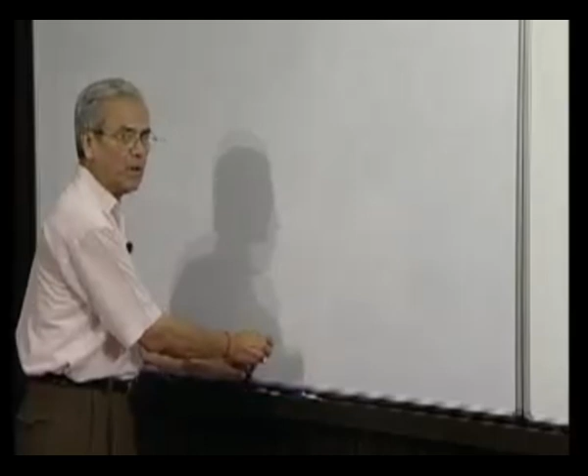What we will do now is analyze or investigate the oscillation of systems, assuming a certain amount of damping to be present. Before we make a mathematical model which we will ultimately solve and investigate, we have to first see the various ways energy is dissipated from a system during its oscillation. The various mechanisms which are common are as follows.

One is viscous drag, which results from the friction of a solid object when it moves in a fluid, and when it can be treated as laminar motion, meaning the Reynolds number is low, or the system behaves in a linear fashion. We will see that very soon. This kind of damping is called viscous damping.

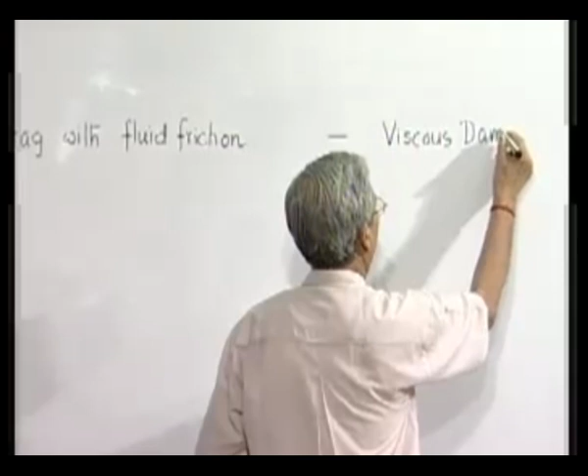The next mechanism is energy loss due to solid friction between rubbing solid surfaces. This type of damping is called Coulomb damping.

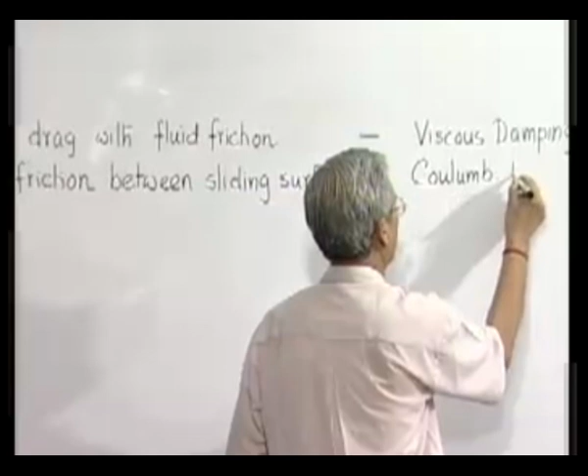For example, if a pendulum oscillates here, the whole body, the rod, etc., have relative motion with the surrounding air or whatever fluid it is immersed in. That gives rise to dissipation of energy, causing viscous damping. Sometimes the pin of the pendulum in its hinge, if not properly lubricated, may give rise to solid friction between the housing or journal of the bearing and the bearing itself or the pin. Similarly, there can be other situations where a vibrating system involves two solid objects rubbing against each other, giving rise to Coulomb damping.

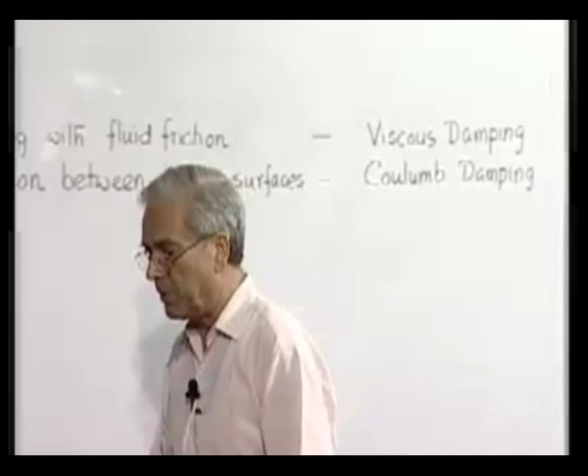Now, for example, if we take a simple cantilever beam, or a simple beam rather, go to space and hit it so it starts vibrating, and leave it there—there is no fluid surrounding it for viscous damping, nor contact with any other solid object for Coulomb damping. But will the vibration remain constant, or will the energy remain constant, meaning there is no dissipation? No, there will still be dissipation, because during any deformation of a solid object, there is internal friction.

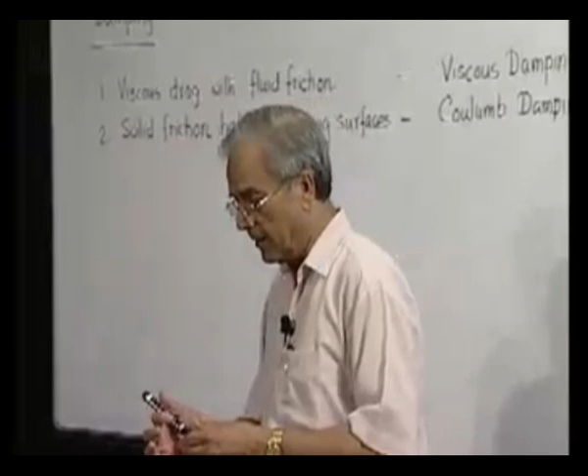That is a very complex mechanism which we will not go into—how the layers of molecules rub against each other, and the grain boundaries may have relative movement against each other. All these things give rise to a certain amount of conversion of mechanical energy into lower forms of energy like heat, and such energy dissipation is called internal friction.

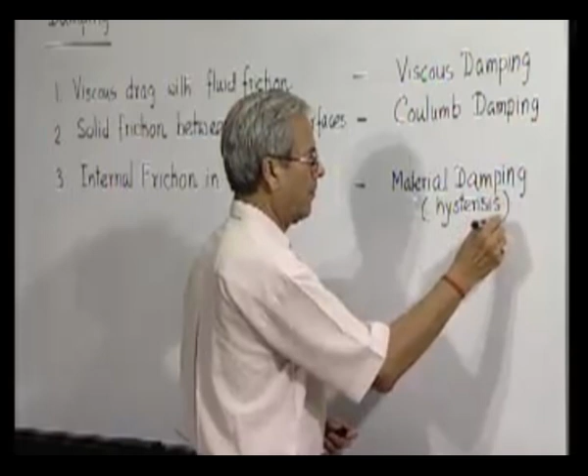This is called hysteretic damping or material damping. Another possibility of dissipating energy is in the form of radiation, which can also give rise to energy dissipation.

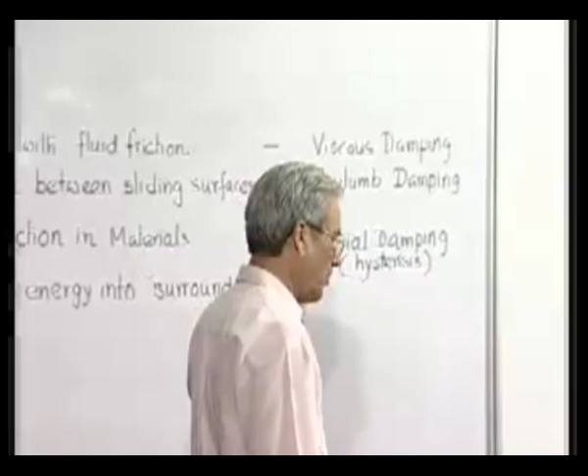However, we should keep in mind that the first three are of much bigger importance so far as engineering systems are involved. The most commonly involved problems we will consider involve viscous damping, the reason for which I will discuss. Then we will also discuss Coulomb damping, the dissipation due to solid friction, and quickly cover internal friction or hysteretic damping in materials. First, let us take viscous damping.

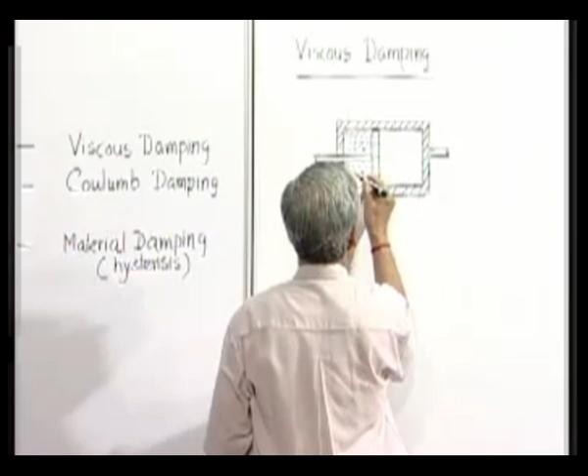Let us consider this sectional view of a cylinder with a piston inside. The piston is connected to one rod, and the cylinder is connected to another. The inside is filled up with some kind of viscous fluid, some oil or something like that. Now the cross sectional area is, say, A.

A1 is the cross sectional area. This piston has fine holes drilled into it, through holes, and the total cross sectional area of all these holes which have been drilled is say A1.

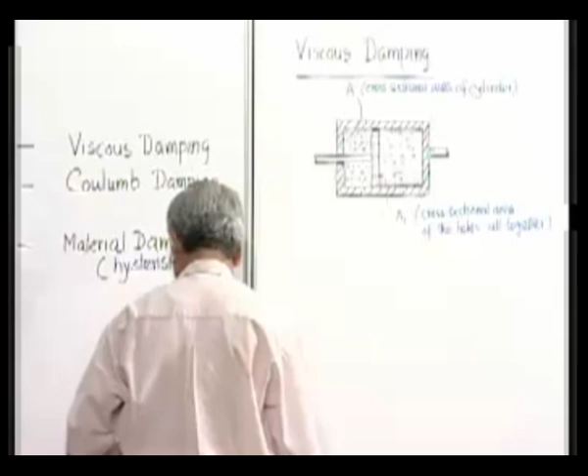Now, if I keep this end fixed and try to pull this end with a speed x dot, that end is fixed. To draw it in this direction with a speed x dot, we have to apply a force Fd. Now how Fd depends on x dot, that is our problem.

So what happens when we pull this piston in this direction, fluid on this side goes through these holes to the other side, because fluid is incompressible. When we try to reduce this volume, obviously the fluid has to go to the other side where a similar amount of volume is created.

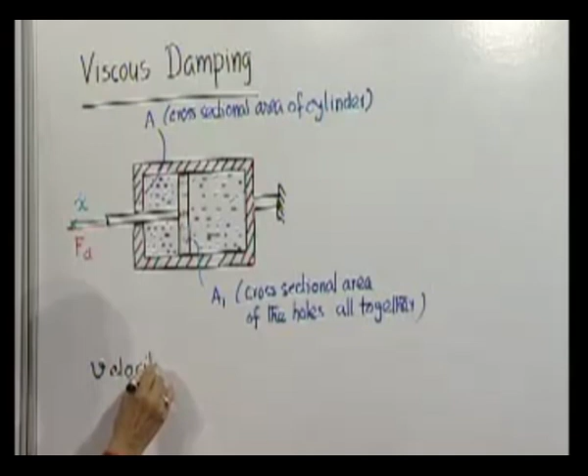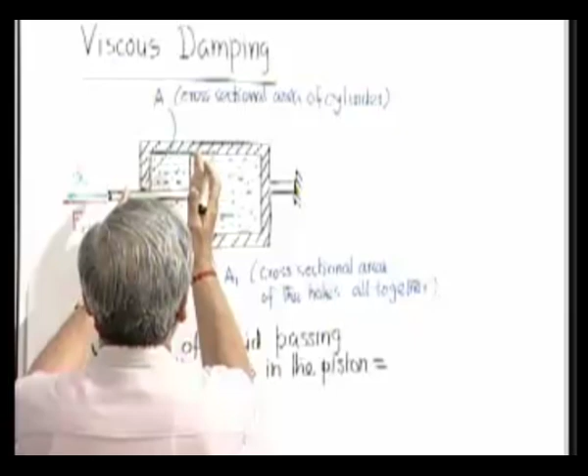So the velocity of the fluid passing through the holes drilled in this piston will be how much? We know the amount of fluid which has to go per unit time will be the speed with which it is coming to this side into cross sectional area. We ignore the cross sectional area of this rod, which we can ignore. So the rate at which total volume of fluid must flow to this side is cross sectional area A times the rate at which this volume is reducing, that is x dot into A. And the cross sectional area through which it flows is A1, total amount. So the velocity through this hole must be this.

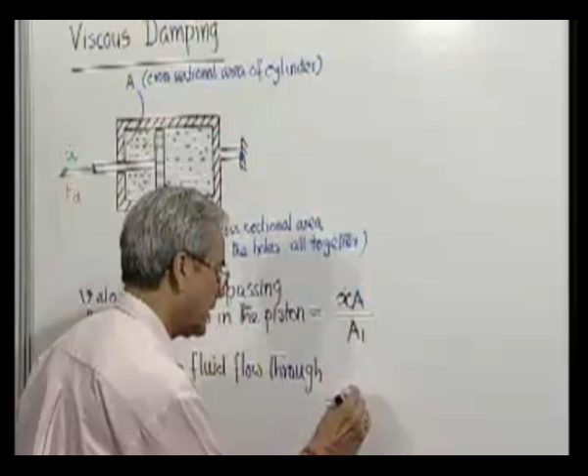Now we also know that the fluid resistance, or resistance to fluid flow, will be something which will depend on the cross sectional area of each hole, length of the hole, surface finish, all those things. But overall we designate it by quantity R.

And we know that for any passage, if fluid flows at a rate V and the fluid resistance of this path be R, then the difference in pressure from this side to this side, say P high on the higher pressure side, P low on the lower pressure side, that is the difference of pressure on the two sides will be given by a quantity proportional to this.

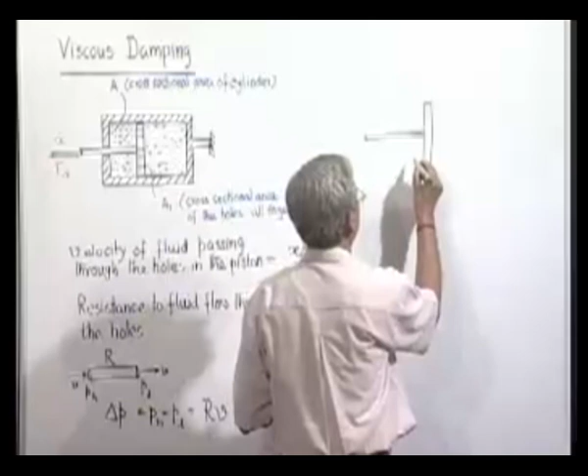So therefore what we find now, the piston, the two sides will have different pressure. What will be the pressure on this side? Higher pressure will be on this side, and lower pressure will be on this side, because fluid is flowing from this side to that side. So this side is higher pressure.

How much is that? P higher into cross-sectional area A. Again we have made it approximate, ignoring the cross-sectional area of that. On the other hand, pressure from this side, which will be lower pressure, the total force will be, and the force which we are applying here, Fd, the whole thing has to be in equilibrium because there is no acceleration.

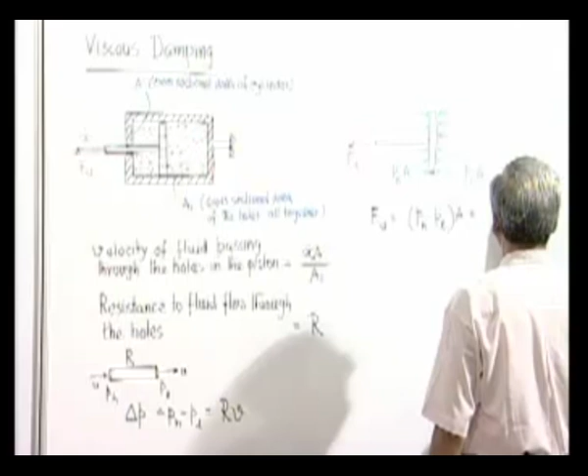So this force balance tells us Fd is equal to, and this is equal to the total resistance of the path of all the holes together into the speed of the fluid passing through that, which is x dot A by A1 into A. So therefore we find that this is nothing but R A square by A1 into X dot. So effectively we find that Fd is proportional to x dot.

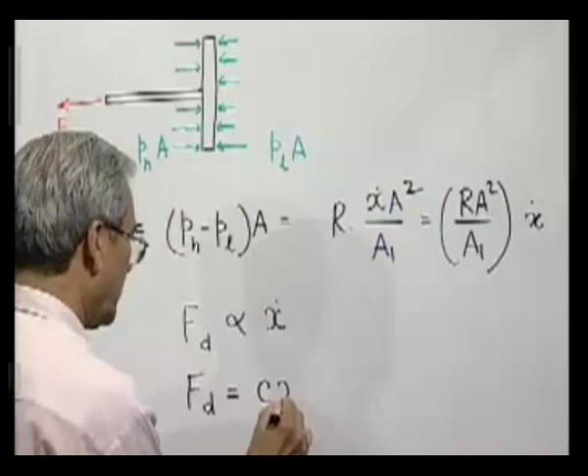All these things of course are valid, as you know, only for laminar flows. So we are considering that for a suitably viscous fluid the flow will be laminar. Or we can write the constant of proportionality by a coefficient which we call C. This coefficient is a special property for a particular damper, and its dimension, kind of fluid, everything will depend on that.

So therefore we find that we get the damping force linearly dependent on the velocity of the object. So viscous damping in its normal form provides a force which is a linear function of the velocity. That is why it is so easily amenable to solution, because the differential equation which we will get will be a linear differential equation that we can solve.

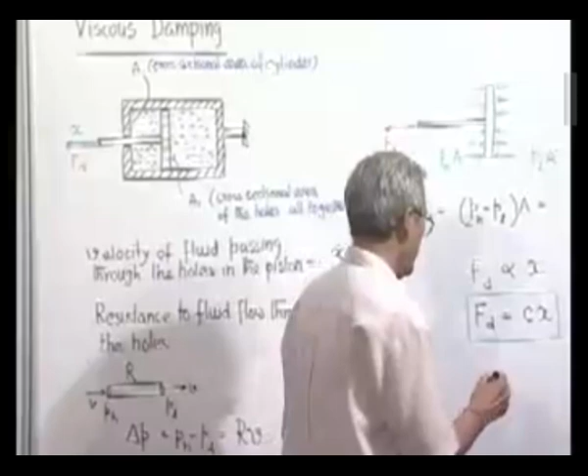So with this little introduction to viscous damping mechanism and the job of a damper, we will now take up our single degree freedom system and its lump parameter model. The dampers, viscous dampers, are generally represented by this diagram.

So when this is moved with a velocity x dot, it needs a force Fd which is equal to, with of course this side fixed.

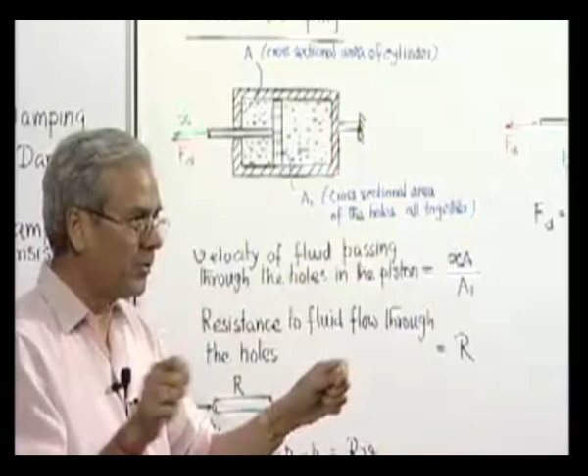So now this damper here, its predominant property is providing a damping force. We will ignore its mass, we will ignore the elasticity of the whole system, that means any kind of stiffness which may be present. So this becomes an ideal situation without any mass, without any stiffness, that means it is perfectly rigid. Its only job is to provide a damping force. So the lumping of this damping parameter will be to this idealized situation.

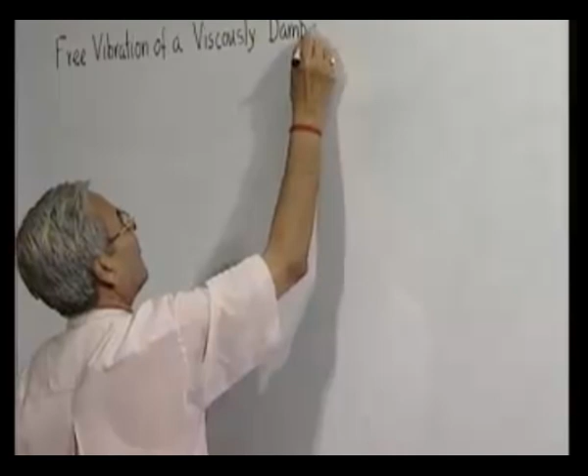So let us now take up the simple case of a single degree freedom system with viscous damping and its free vibration. So we take up now the case of free vibration of a viscously damped single degree freedom system. We just go one step ahead of the first and simplest model where there was no energy dissipation. The lumped parameter model.

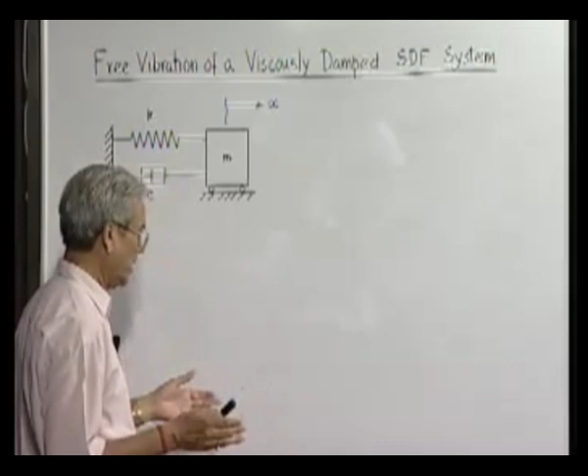So this is the lumped parameter model of this system, and of course its equilibrium position will be such, when it has been left to itself, that this spring has taken its equilibrium, the natural length position. Because if the spring is stretched or compressed, it will again slowly either go out or come back, so that this mass can come to that position when no force is acting on it. That means when it is stationary, there is no viscous damping force, and the spring is at natural length, so no compression or tension force in that.

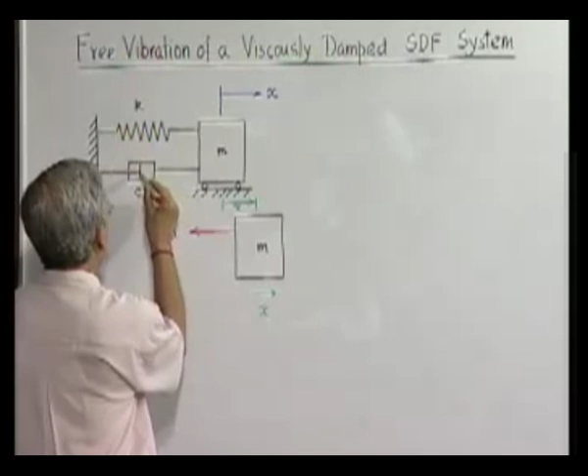Now when we displace it, mass is here, the forces which will be acting, there will be two forces now. As we know that at any instant its position is x, there will be a spring force which will be k into x, and if at this instant its speed is, and it is moving at a speed x dot, then this damper will provide a damping force also like this. It will try to prevent its expansion, and its acceleration will be algebraically positive acceleration in this direction.

So therefore the Newton's second law for this will be what? It will be m x double dot must be equal to the total force in this direction, which now is minus kx minus c x dot, so this becomes the equation of motion of the mass when viscous damping is present. That means this term has come.

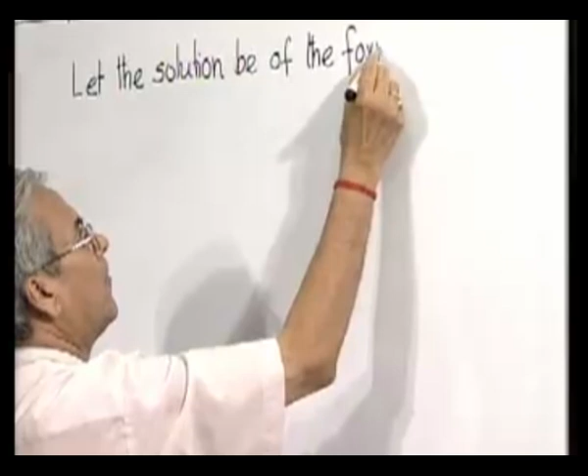Now to solve this differential equation, we proceed in the standard way. That means let the solution be, so when you substitute it here, we get m s square e to the power st plus cs e to the power st plus k e to the power st equal to 0, and the characteristic equation what we get for s is a quadratic equation like this. Quadratic equation will yield two values of this s.

s1 and s2, which you can write simply as minus c plus minus square root of c square minus 4km, sometimes you can write it like this.

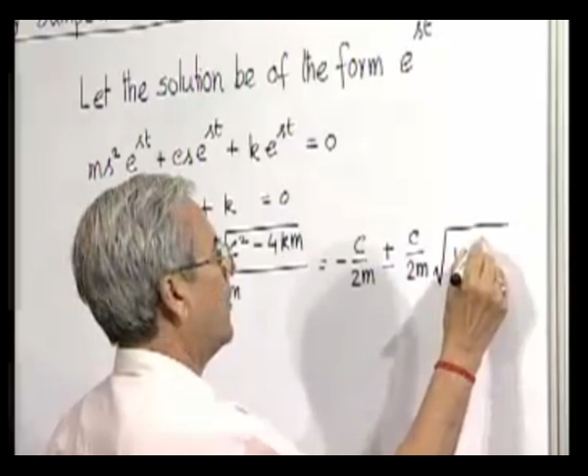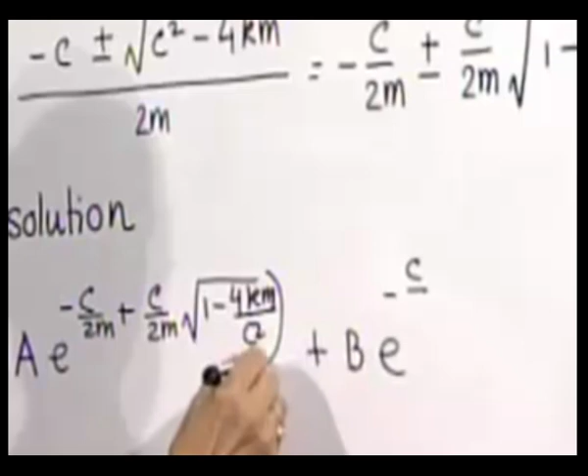Now, the general solution, general form of solution for the motion, that is x(t), we can write as a, say, e to the power minus c by 2m plus c by 2m square root of 1 minus 4km by c square, plus b, so a e to the power s1 t plus b into e to the power s2 t. This is the general form of solution.

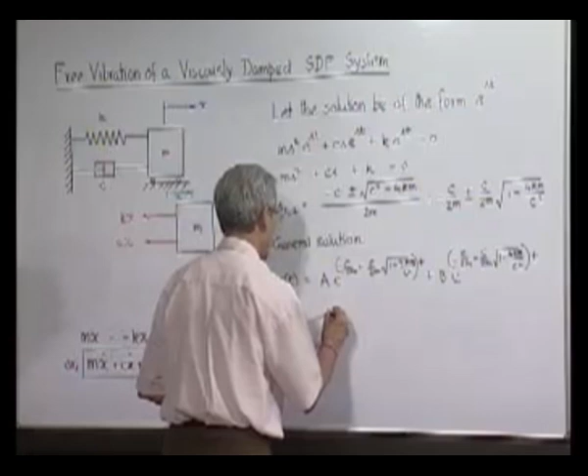Now, what will be the nature of solution? Let us first see before we proceed further. You can see that a situation when 4km by c square, this quantity is less than 1, so case 1, where 4km by c square is less than 1, that is c square is more than 4km.

Under this situation, this whole quantity is a real quantity because this is real, these are all real, and since it is 1 minus something, this quantity will be less than c by 2m because this is less than 1, and since this is negative and this is positive, this whole quantity will be a negative real quantity. So e to the power a negative real quantity into t is nothing but an exponentially decaying term with time. So x, the first term, will decay as t progresses.

Go to the second term. Here again you find that this is a positive quantity less than 1, and this is negative, this is negative. So this one again is a negative real quantity, and therefore this is also nothing but an exponentially decaying term, but here the decay will be faster. So both the terms are exponentially decaying with time, and so we will have...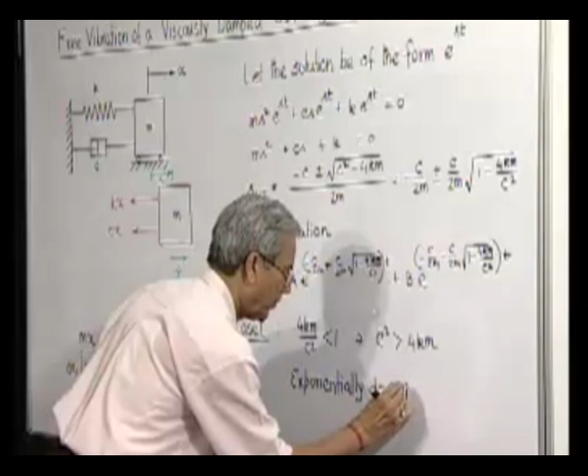This kind of motion, that means it is going to just asymptotically approach 0, is called aperiodic motion. It is not going to be a periodic motion where the equilibrium position is crossed again and again repeatedly. There is no question of any period. And this situation, which results in this kind of motion, this condition is called overdamped.

So, when the damping is very strong and is more than this quantity, the system does not execute any oscillatory motion. It decays as time increases, resulting in an aperiodic motion.

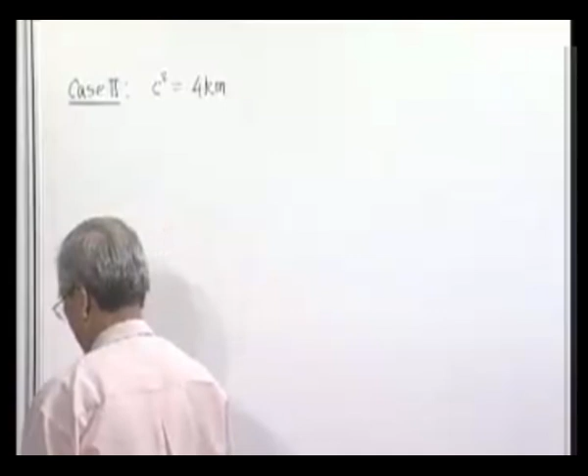The next possibility is case 2, when C square is equal to 4km. This is a critical condition, and with this condition, what we may say, which satisfies this condition, C is called CC, and the system is a critically damped system.

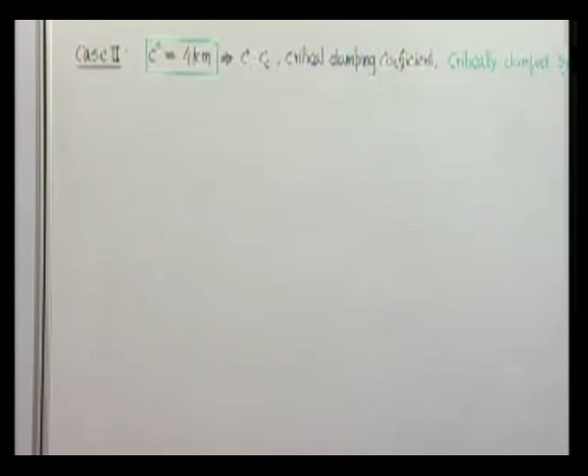So, in this case, when C square is equal to 4km, that is when C is a particular value, which you also indicate by the letter C subscript C, we call it critical damping coefficient, and with this situation the system is called critically damped system. Now, what will be the nature of solution in this case? We know that S1 will be equal to S2 will be equal to minus C by 2m.

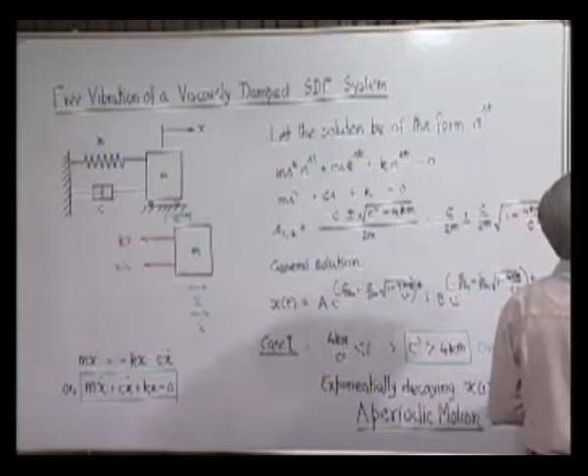So, when the two roots are equal, the general solution is x(t) equals (a + bt) into e to the power st, which is minus c by 2m. Here again we see that as t increases, this increases perhaps linearly. Of course, we have to find out what will be the nature of A and B, we will discuss that later. But this is an exponentially decaying term, and so as a result, here also we get aperiodic motion.

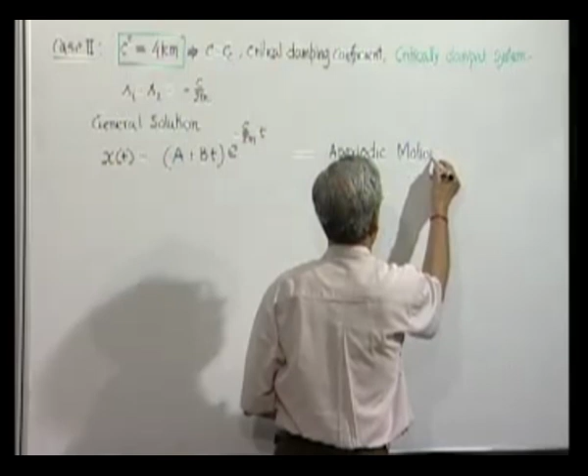So here, for example, in an overdamped case, we displace the mass and leave it, so it will go and approach the equilibrium position asymptotically. Here also, if you just pull it and leave it, it will again go aperiodically and asymptotically approach the equilibrium position. The only difference with the overdamped case is that here it will approach the equilibrium position in the shortest possible time. So, in situations where we want a system not to execute oscillatory motion, there are many such situations.

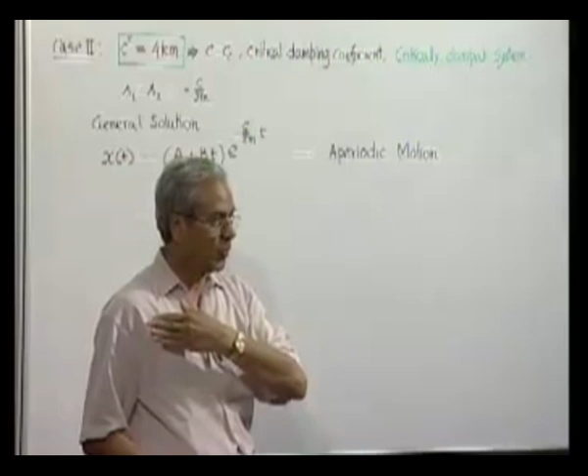We will take up some examples, like say door closure. When you open a door and if you leave it, if it has to execute an oscillatory motion, it will go through the door frame with the maximum velocity, which you do not want, because then it will bang somebody and it is not a very desirable situation. On the other hand, what we would like is for it to go and close at its equilibrium position with 0 velocity or negligible velocity. So therefore, we will try to put damping which will provide aperiodic motion.

At the same time, we don't want this closing to take an enormous amount of time. We want this to close as quickly as possible. Say the room is air conditioned, so therefore we don't want the door to take a long time to close when left. If somebody comes in and leaves the door, it should go and close in the shortest possible time. So therefore, in such situations, we provide the system with critical damping.

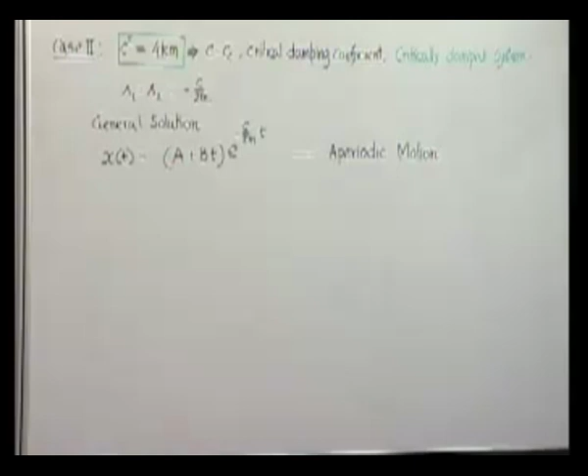Another example is, say, cannon recoil system. When cannons are fired, they get a recoil, and if it is only a spring, then it will keep on oscillating, which we don't want. So we want the cannon to recoil, and then while it goes on this side, the damper is attached, and it should go asymptotically at the quickest possible time, and again we provide critical damping. Same is the case with shock absorbers in many vehicles or suspension systems, where we want the system to approach the equilibrium position without oscillation at the quickest possible time, and that's where the importance of critical damping lies.

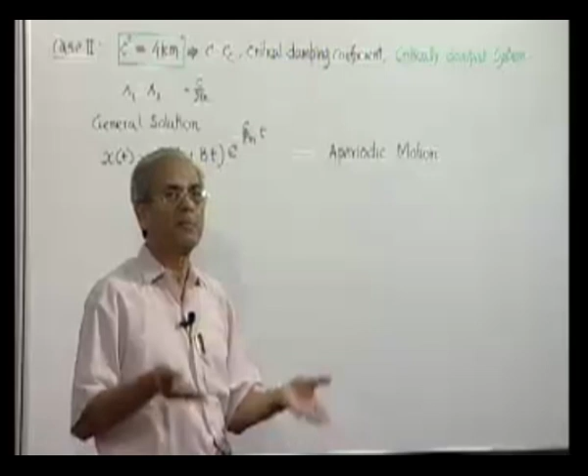In practice, we keep it slightly above critical damping, because due to temperature rise or something, if the viscosity of the oil inside the dashpot reduces, then it may go below critical damping and the system may oscillate. So therefore, generally it is kept very near critical damping, slightly above. Now, it is important to see what happens in the other case, that is the only case left.

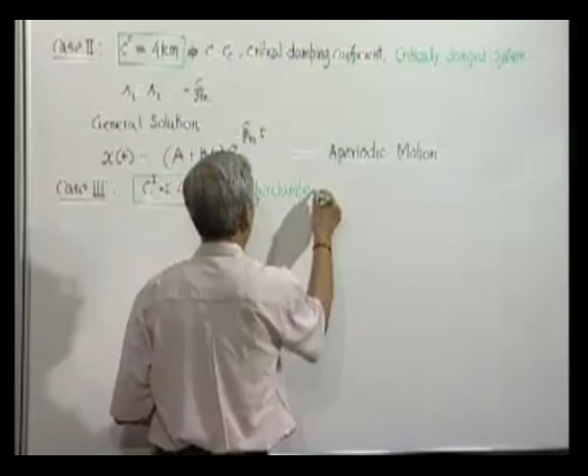When damping is small and it is less than 2 square root of km, then the system is called underdamped. And what will happen to these roots? We will have roots will be

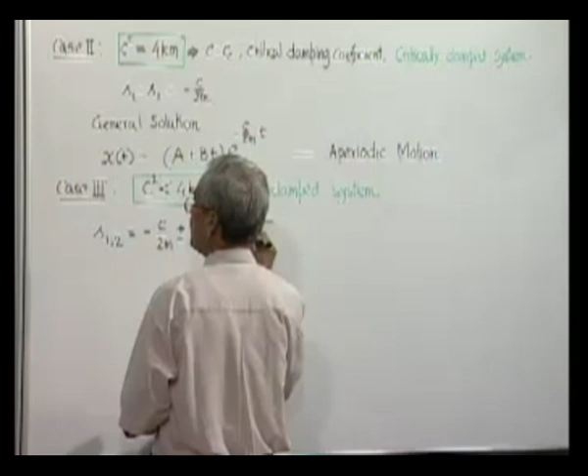Now if C square is less than 4 km, obviously this quantity is positive, more than 1. So whatever you put inside the square root is positive, that is okay. But we have multiplied the whole thing by -1, so this I has come. Therefore now we find that the two roots are complex. There is a real part and there is a complex part. And the solution

Before we proceed further, it will be desirable to have certain symbols or concepts developed here. It is not generally convenient all the time saying C square is more than or less than or equal to 4 km, because this particular critical damping coefficient is only for this particular configuration. A different configuration can give a different relation, as you will see while solving some problem. So there should be a better way of telling whether a system is damped, underdamped, overdamped or critically damped.

What we do, at least for this particular case, is find that Cc is equal to 2 square root of Km, and this quantity C by Cc, the ratio of the actual damping coefficient and the critical value which just distinguishes between the aperiodic and periodic motion, is defined as the damping factor.

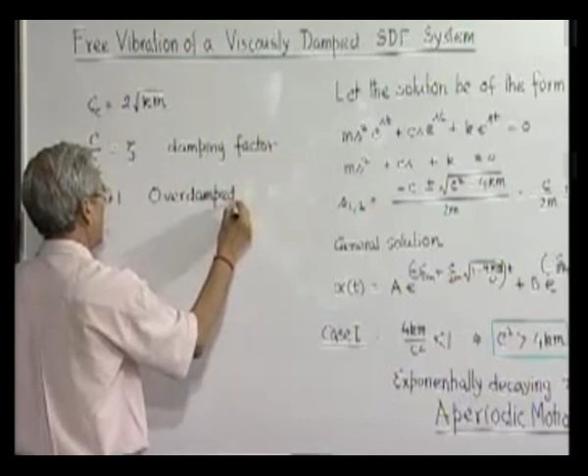And when zeta is more than 1, it is overdamped. When zeta is equal to 1, critically damped. And when for a system zeta is less than 1, it is underdamped.

I think we will do that, but before we proceed further, just to comment on this nature of solution we have got: this is an exponentially decaying term, but inside this we have a quantity a into e to the power I theta plus b into e to the power minus I theta. We all know that this represents a harmonic function of time. We will write it down later after we use this concept and do the necessary changes here.

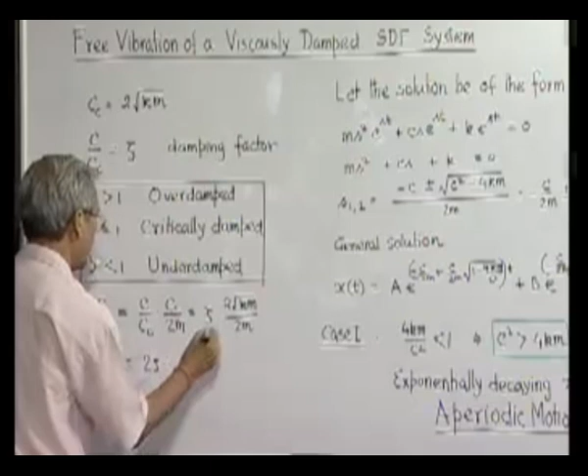So therefore here we will find the quantity C by 2m can be written as C by Cc into Cc by 2m, and here this is zeta obviously, and Cc is 2 square root of Km for this particular system, divided by 2m, and this is equal to 2 zeta, and this becomes square root of K by m

and this is equal to, we know, the undamped natural frequency of the system. That means the system we are investigating, if you take out the damper, whatever will be the natural frequency will be square root of K by m. So wherever we have C by 2m, we can replace it by this quantity.

So therefore, for the 3 cases, let us write the solution using this concept. So for case 1, the solution will be, or the general solution will be now, it is better that we do the general solution. It will be A e to the power

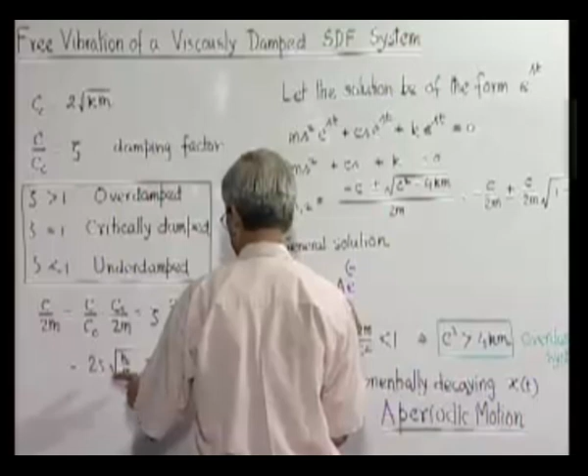minus C by 2m is 2 zeta omega n, we have already seen. C by 2m is 2 zeta omega n, plus again C by 2m is 2 zeta omega n square root of 1 minus. Now this is critical damping coefficient square, Cc square. So it will be 1 by zeta square.

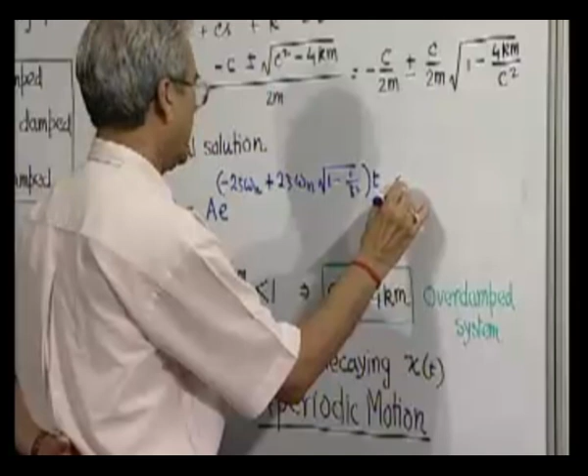plus b e to the power minus 2 zeta omega n minus 2 zeta omega n square root of 1 minus 1 by zeta square. So this is the general solution.

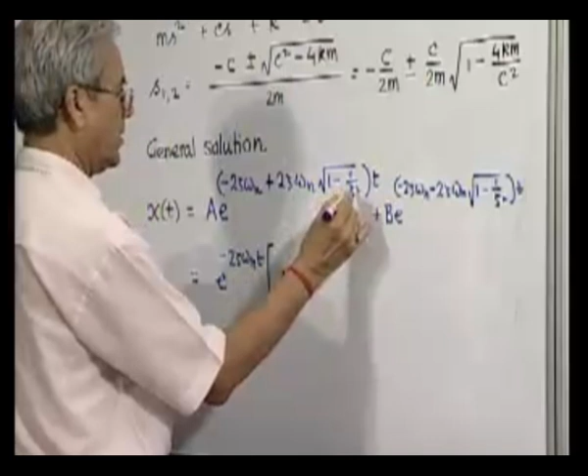We can write it in this form then, e to the power minus 2 zeta omega n t is common in both the cases. So it goes inside, a outside, e to the power. Now if I write it zeta square root of 1 minus zeta square or zeta square minus 1 here, so we get 2 omega n zeta square minus 1 t plus b e to the power 2 omega n zeta square minus 1.

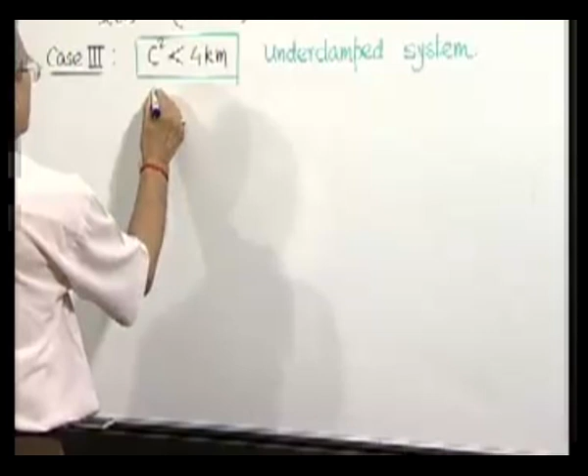Now, depending on the value of zeta, whether it is more than 1, equal to 1, or less than 1, our solution will depend. Of course, when it is equal to 1, then you have to follow this form of general solution, that you have to keep in mind, not this form. So now when we have case 3, that is zeta is less than 1.

So xt can be written as e to the power minus 2 zeta omega n t and a e to the power. Now zeta is less than 1, so this quantity is negative. So we can write this in this form: 2 I omega n square root of 1 minus zeta square t plus b e minus 2 I

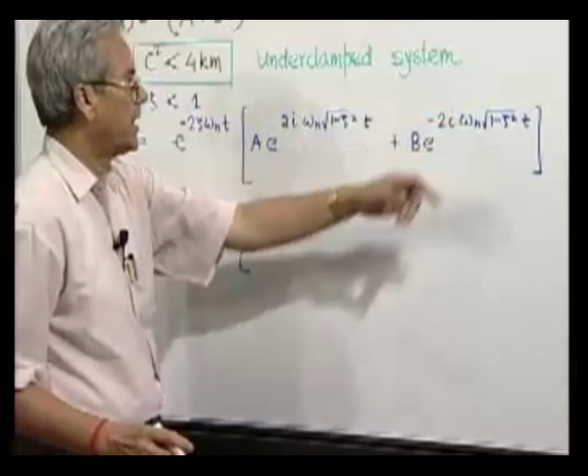and this is nothing but of this form. If we express e to the power I theta and e to the power minus I theta, you will ultimately get it will be something like a1 sine... I think these two cancel.

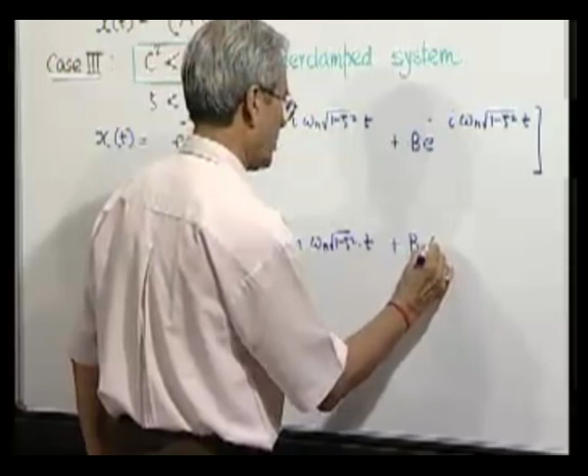Sine omega n root of 1 minus zeta square into t, plus b1 cosine omega n... Observing this, in the underdamped case we find that the system is oscillating with time. But if it had been only this, it would have oscillated like the case we solved first without any damping. But the whole thing is multiplied by an exponentially decaying function with time.

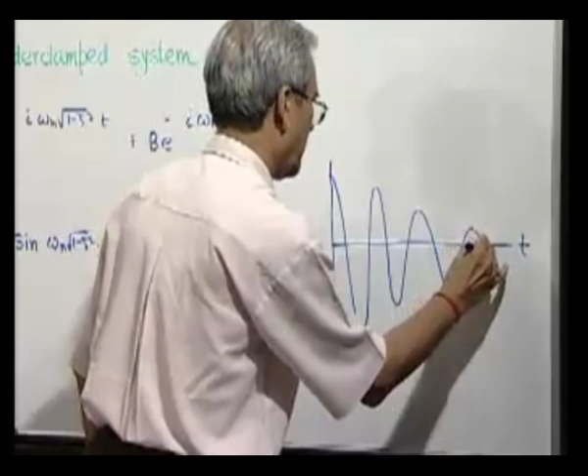So the resulting motion is slowly decaying, whereas in the previous cases we know they are aperiodic motion. Same thing in the underdamped case - now we have oscillation, but the magnitude of oscillation is gradually decreasing.

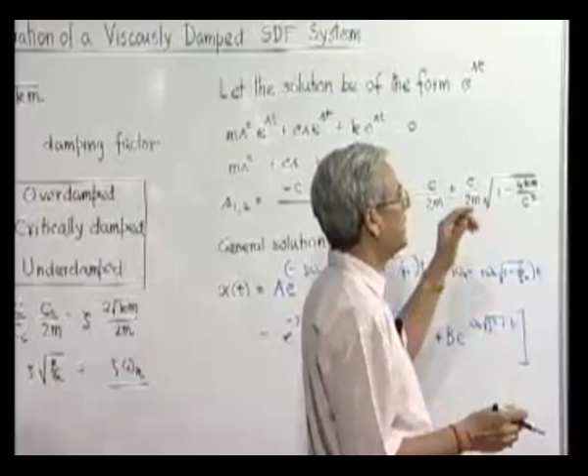So what we have learned till now is that for a viscously damped simple spring mass dashpot system, depending on the magnitude of the damping coefficient of the dashpot, there can be three possible situations. One is called overdamped, when the damping factor is more than 1, then the resulting motion of any disturbance is an aperiodic motion, whereby the system approaches its equilibrium position asymptotically. With the critical damping coefficient, when zeta is 1, it is a similar kind of behavior, only it happens with the quickest possible time.

On the other hand, when the damping factor is less than 1, the system is underdamped and it executes an oscillation when disturbed, but with a diminishing magnitude as time progresses.

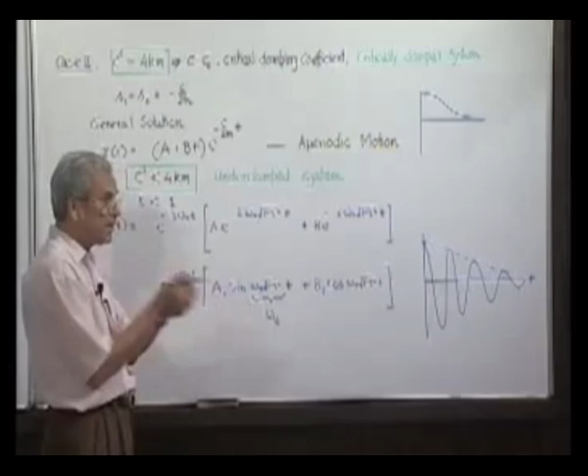We also notice another important thing besides the fact that the vibration diminishes in magnitude with the progress of time. The frequency of oscillation, which we call damped natural frequency, is also slightly lower than the natural frequency of the system if we take out the damper. Without damping, it will oscillate a little faster with a higher frequency, whereas with damping present, it will be a little less than the natural frequency without damping for the same system. So this is called damped natural frequency, which is nothing but omega n into root of 1 minus zeta square.

Now, if we want to investigate further cases, we will look into the general solution. Before we attempt that, let us further discuss the impact on the resulting motion of the nature of the initial conditions on which A and B will depend. Before that, let us quickly look into the matter of underdamped vibration as we have seen here.

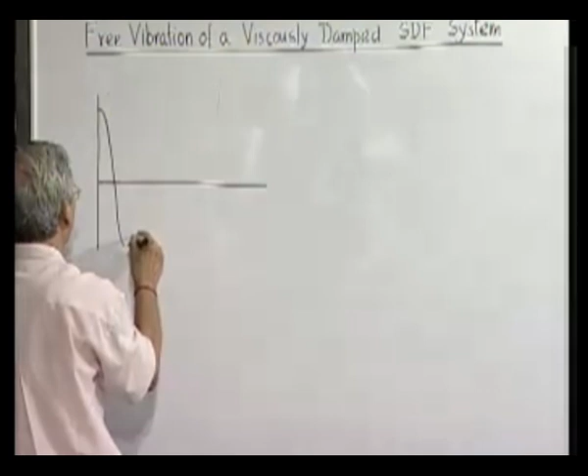Now, if a system vibrates, it is given by x... or we can write it in another form. That equation can be written in this form. These two constants A1 and B1 can be replaced by two constants, x and phi.

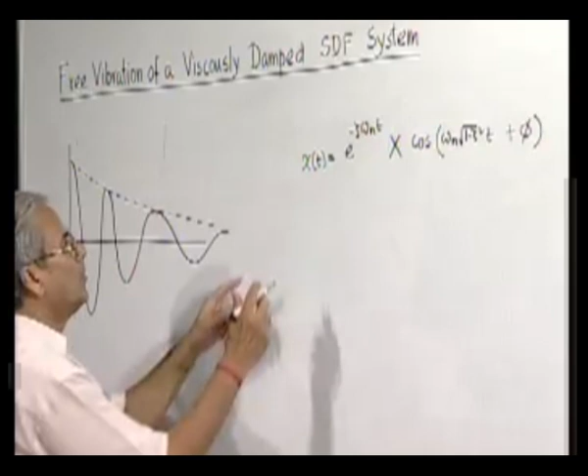We have seen this when we discussed harmonic oscillation in the earlier lecture. So the amplitude - suppose this is the nth amplitude, and the next one is n plus 1. Taking two successive peaks, what is the time taken for the system to go from one peak to another? Obviously, it is nothing but the time period.

How much is this time period? The time period is 2 pi divided by the damped circular frequency, or the undamped natural frequency into root of 1 minus zeta square.

So your x n by x n plus 1 - how much is x n? X n is given by this expression for a particular time, so it will be e to the power minus zeta omega n t into x. And what will be the value at the time of the next peak? It will be at t plus tau.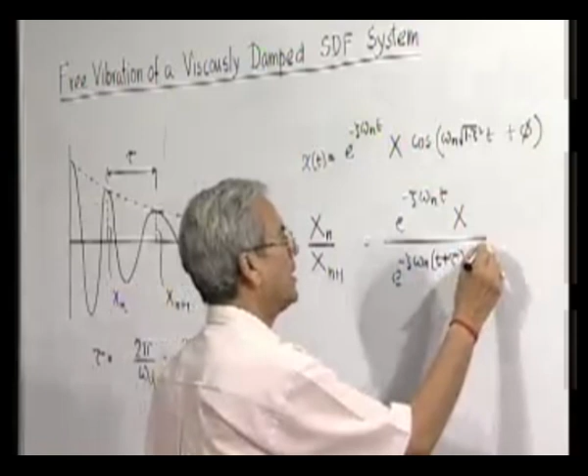And this ratio is nothing but e to the power zeta omega n tau. How much is zeta omega n tau? Omega n tau, you can see from here, is equal to 2 pi divided by root of 1 minus zeta square.

So therefore, if I take the natural log of this quantity, we get 2 pi zeta divided by root of 1 minus zeta square. Now this is a measure of the intensity of the damping.

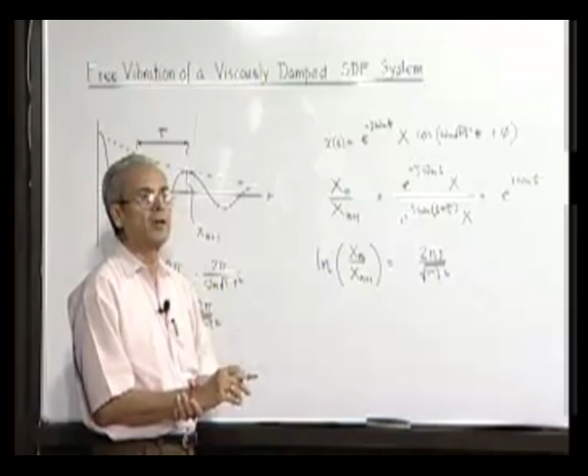That means how fast the amplitude is reducing. The higher this value of the ratio of the two successive amplitudes, the larger is the damping. And when you take the natural logarithm of the ratio of two successive amplitudes, you can see it does not depend on n - any two successive amplitudes will provide this quantity, and this is called logarithmic damping.

This is a measure of the intensity of the damping. As you have seen, it has to depend on zeta, since zeta represents the damping. So when zeta is small, which happens in many situations, this quantity, the logarithmic damping delta, that is the standard symbol, is equal to 2 pi zeta.

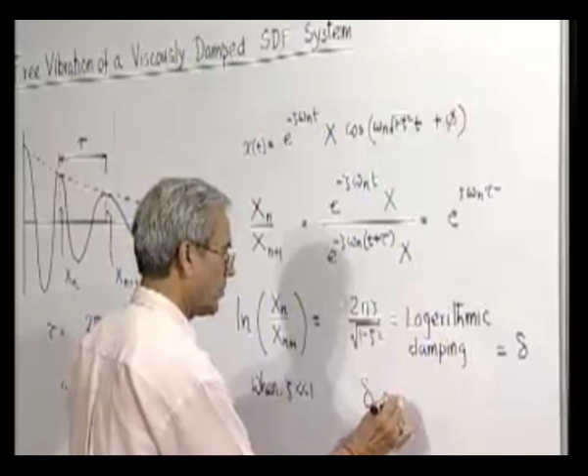Another method of representing the intensity of damping is by how much energy is being dissipated per cycle, and its ratio with the maximum energy during that cycle. Now when the system is vibrating, in any cycle you take, the energy is obviously maximum at the beginning of the cycle because energy is continuously being dissipated.

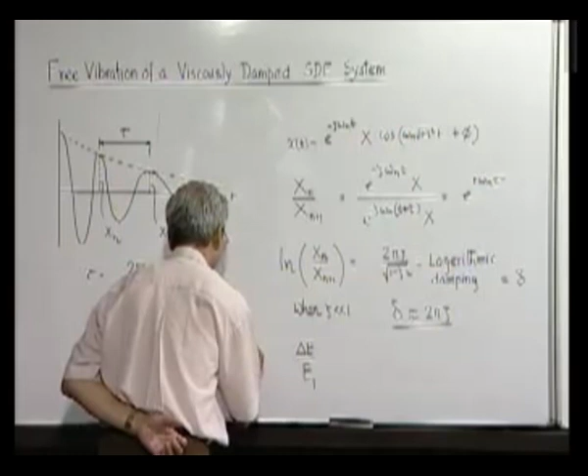So if we take the loss of energy divided by the maximum energy, suppose at the beginning of the cycle energy is E1 and at the end of the cycle the energy is E2. So then this is E1 minus E2 by E1, which is again nothing but 1 minus E2 by E1.

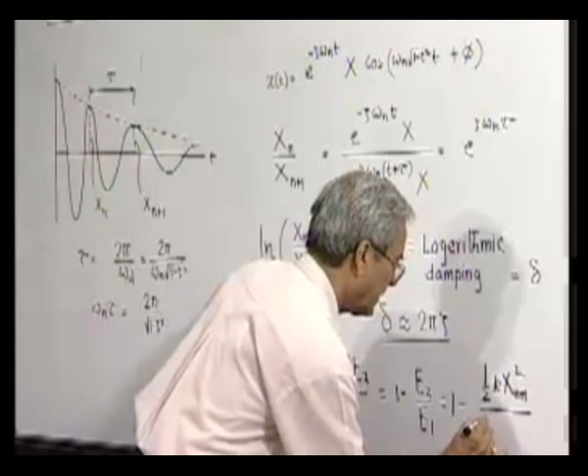Now we know that at the peak position, the whole energy is in potential form, and obviously it is nothing but the strain energy in the spring, that is half K x n plus 1 square, if that is the energy at the end of the cycle, meaning the next peak, divided by energy at the beginning of the cycle, that is the previous peak. So what we get here is delta E by E1 is equal to 1 minus x n plus 1 square by x n square.

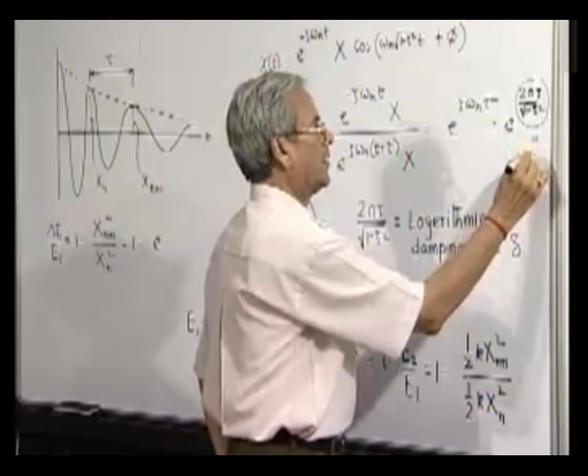And this is equal to 1 minus, how much is x n plus 1 by x n? E to the power minus zeta omega n tau, or since zeta omega n tau is equal to 2 pi zeta, so it will be just opposite. So this will be 1 minus e to the power minus 2 delta, where this quantity is delta.

If we expand it as an infinite series, it's approximately 2 delta. So again we find that this quantity, the amount of dissipation of energy during a cycle divided by the maximum energy during the cycle, is nothing but double the logarithmic decrement. So this is another way we can represent energy dissipation through the amount of energy dissipated per cycle, and you can see the relationship is again there with the logarithmic decrement.

So the measure of the intensity of damping, which we do with the help of the damping factor, during experiments we try to figure out how quickly the amplitude is decreasing, and we take two successive amplitudes and find out the logarithmic decrement. Sometimes it may happen that two successive amplitudes are very close to each other, and therefore there may be a large amount of error involved.

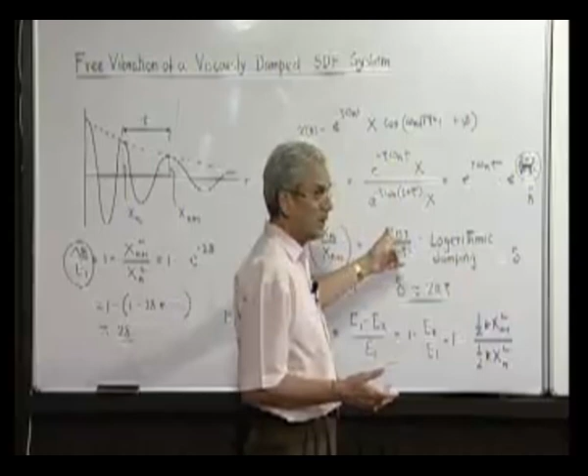So what we can do is take a p number of cycles in between, and take the ratio of logarithms. What we can do is take the logarithm of x n by x n plus p, not just the next one, but after p cycles. You will find this equals p zeta omega n tau, where omega n tau is 2 pi by square root of 1 minus zeta square. So it will be 2 pi p zeta, or simply p delta.

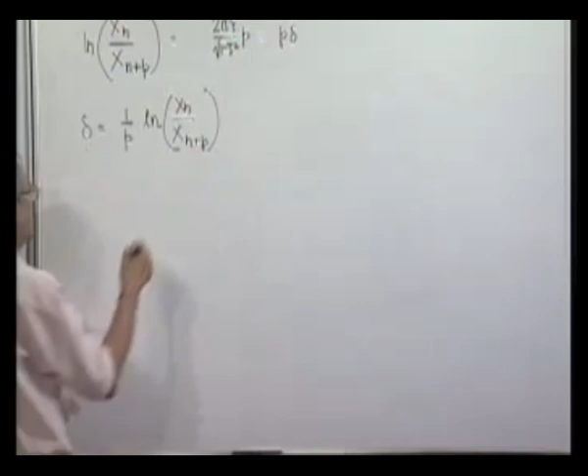So delta can be found out in such cases, and finding this ratio between two amplitudes widely separated can be much better in its accuracy, and that is another technique by which logarithmic decrement is found out.

Now if you want to find out the damping factor, you can find it from delta by using this equation. Delta is given by this, solve this to get zeta, and if zeta is really very small, then we can even use this directly, dividing delta by 2 pi to get zeta, and so on. Then you can also find out the amount of energy dissipated per cycle, and all types of investigation become possible.

So next, what we will do in the next lecture is investigate in great detail what kind of initial conditions can lead to what kind of motions, based on the amount of damping present in the system.